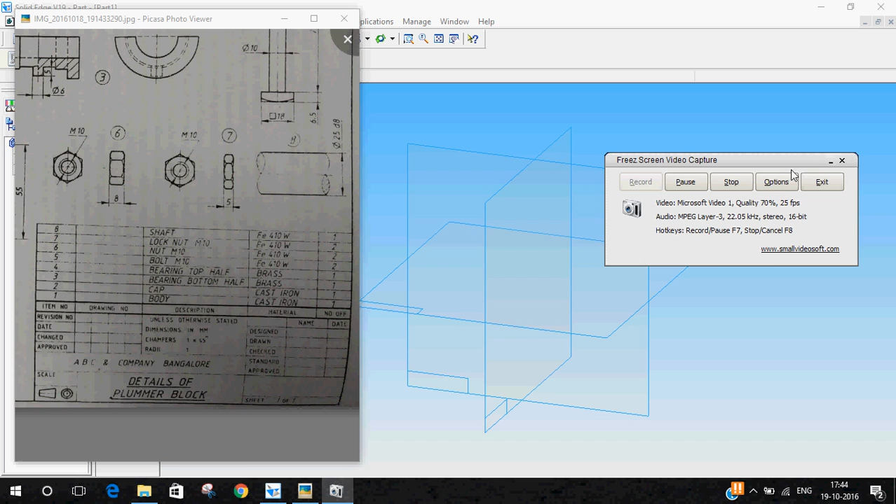We'll start off with the first part, which is the body. You can see the two views of the body here - this is the front view and this is the top view. We'll start off by sketching on the front plane. This part cannot be done in one or two steps; multiple steps need to be followed to finish it. In the first step, we'll start with the base of the body.

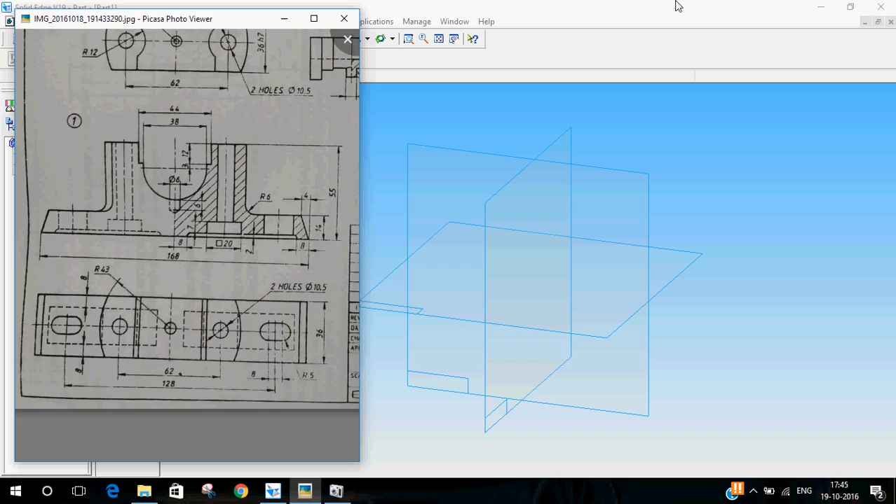I'll select create a sketch on the front plane, and then draw the basic shape of the base, which is a trapezium. Always make sure to take the axis as reference. Don't start off by drawing somewhere randomly - start off on the axis, it will help you.

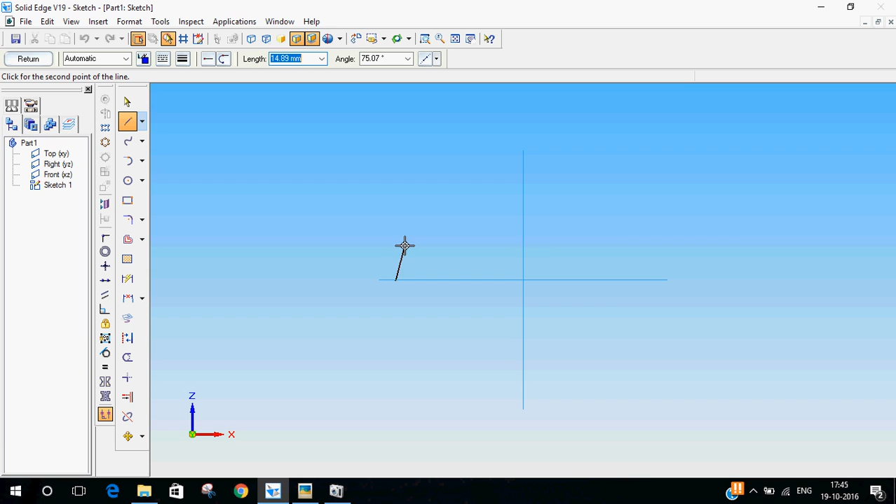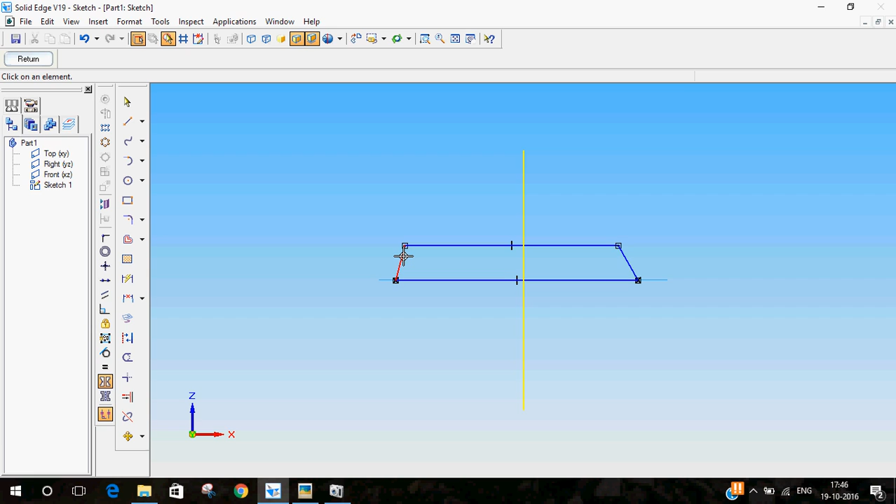Okay, my basic shape is ready now. What I'll do is make it symmetric about the center axis. To do that, select the symmetric relationship option, then first click on the symmetric axis, and then select the two lines or anything that needs to be symmetric. As you can see, now they are at the same angle and the same dimension.

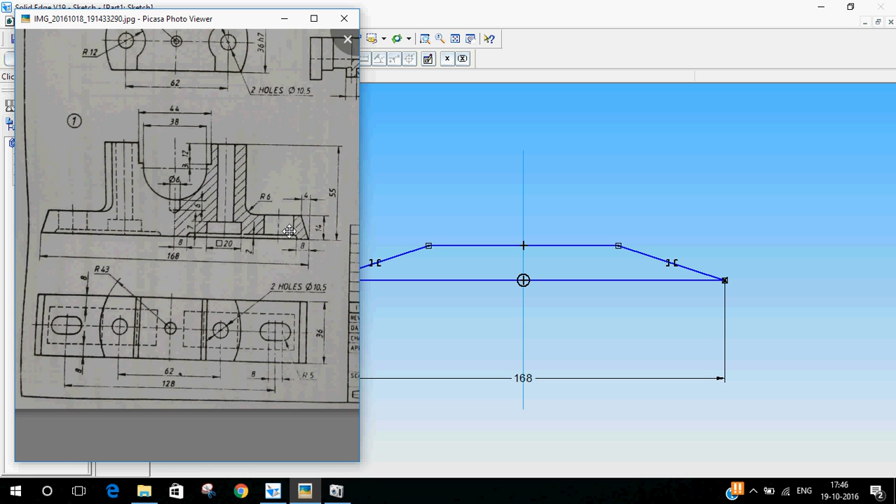So we'll dimension this part now. The total width is 168 mm, so I'll make it 168. This small angled area should be 4 mm, so I'll do that - okay, so this is 4 mm. I'll pull it up. As you can see, the dimensions are changing on both sides. The height is 14 mm.

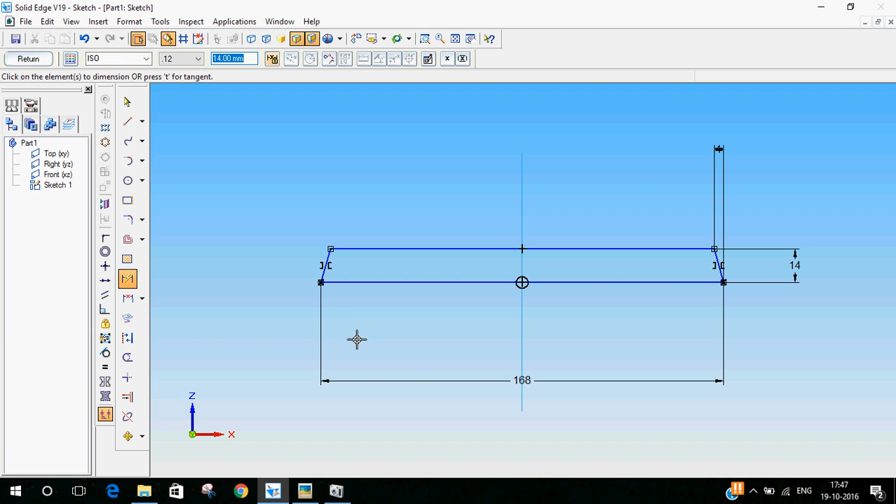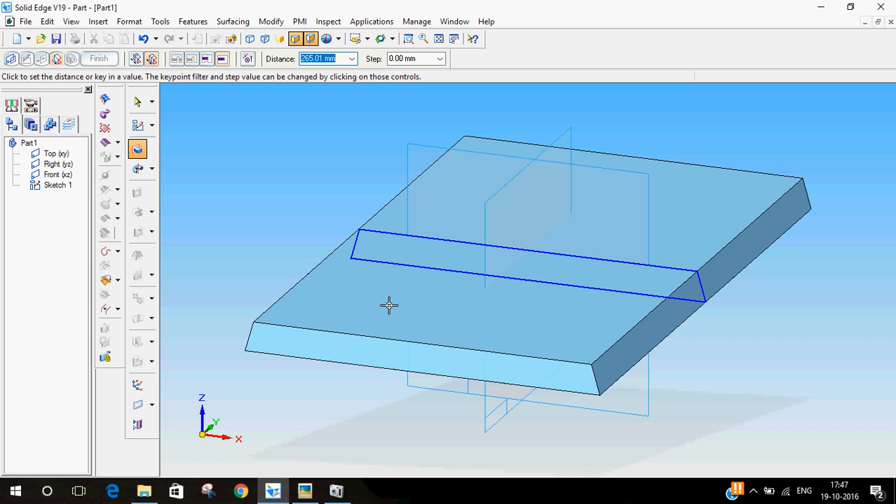Okay, so that is the only dimension we had to give for the base. So I'll return from the sketch, then we'll have to protrude this. Let me protrude this on both sides. Now the width is 36 mm, so I'll type in 36. Okay, so the protrusion is done. Always hide the sketches.

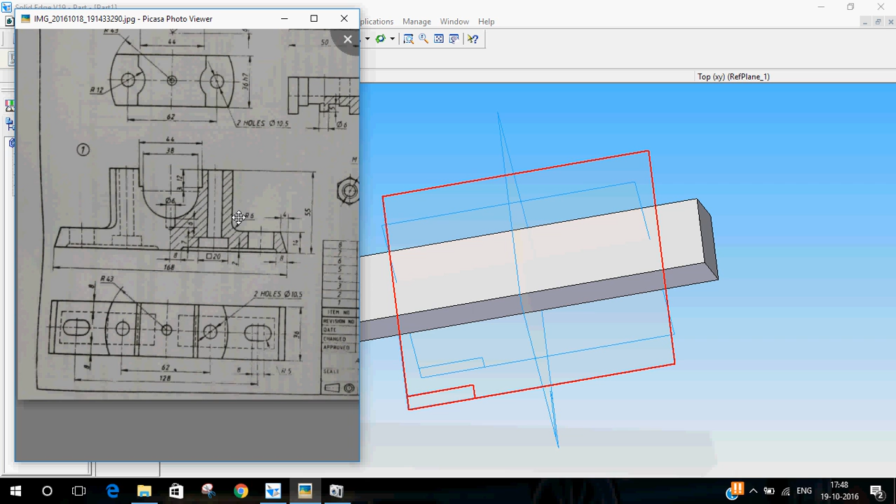Okay, so the base is ready now. The next part is we'll have to do the curved surface which is on the top. As you can see, this curved surface extends down till the base. So to do that, I'll select sketch on this top plane of the base. Now we'll start sketching it.

As you can see, there is a full circle of 43 radius, that will be 86 diameter. I'll draw that out first - from the center should be 86. Here I'll set the dimension, it's 86. The next thing is you just have to close these two lines and trim off the remaining edges.

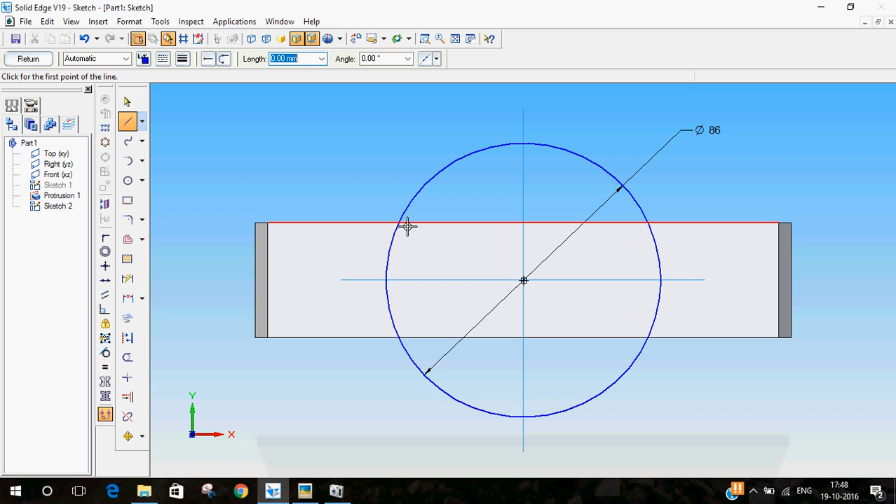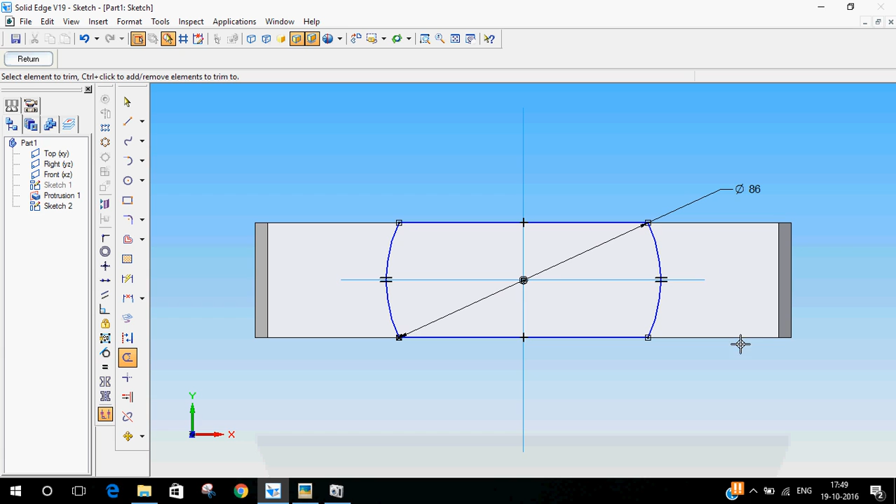To do that, I'll draw a line at the intersection point from here till this line, and do the same thing at the bottom also. Okay, so now we will have to trim out the unwanted edges. So this is unwanted, I trimmed it out. I'll see whether anything else is left. Okay, that is only so much we have to do in this step.

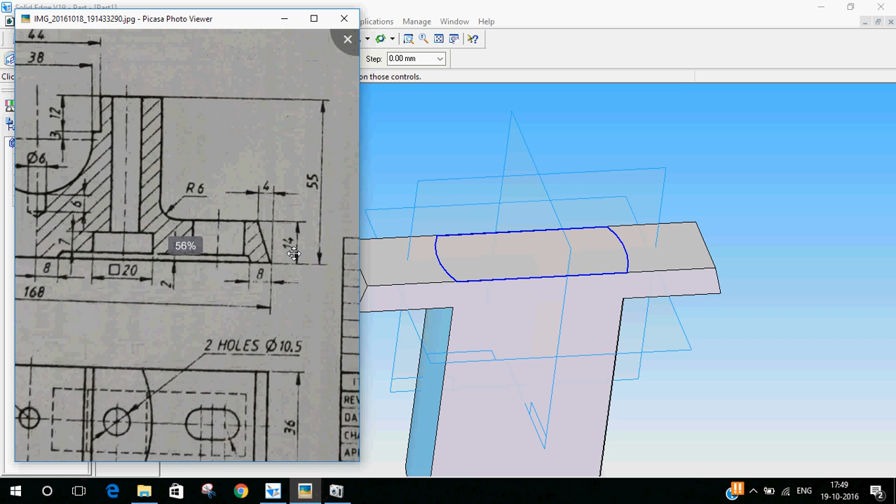So I'll return from the sketch, select protrusion, select the sketch, and then protrude it upwards. The total height from the base is 55, so I'll have to protrude it to 55 minus 14 mm, which is the base we already did. So this will be 55 minus 14, that is 41 mm.

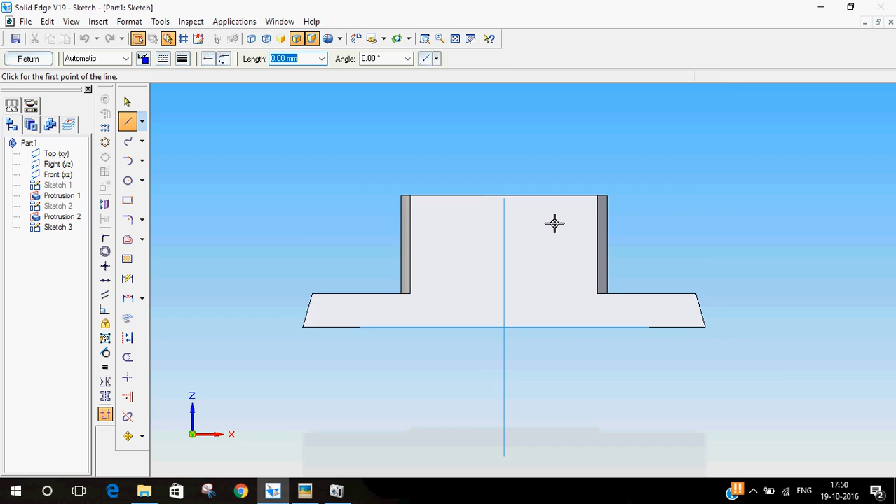Okay, so now the basic shape is ready. Now we will have to cut out this part from the top portion. To do that, I'll select sketch on the front plane and then draw the profile. The profile consists of a semicircle and some lines, so first we'll start off with a semicircle.

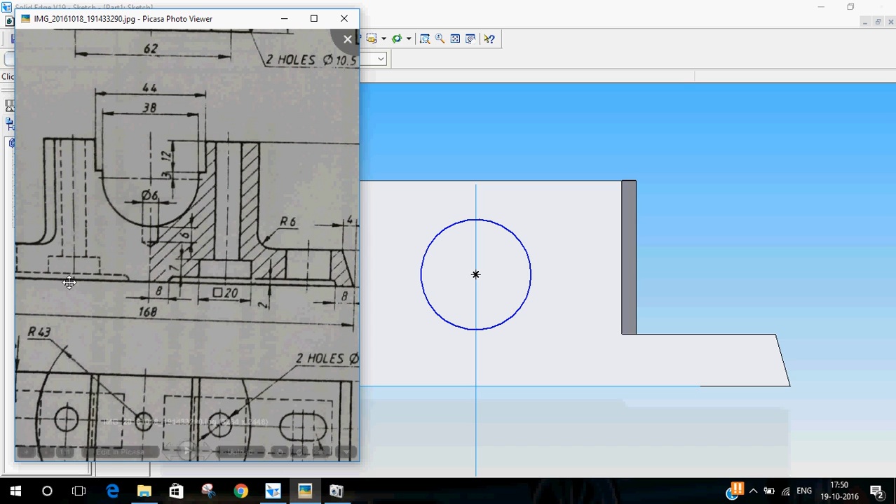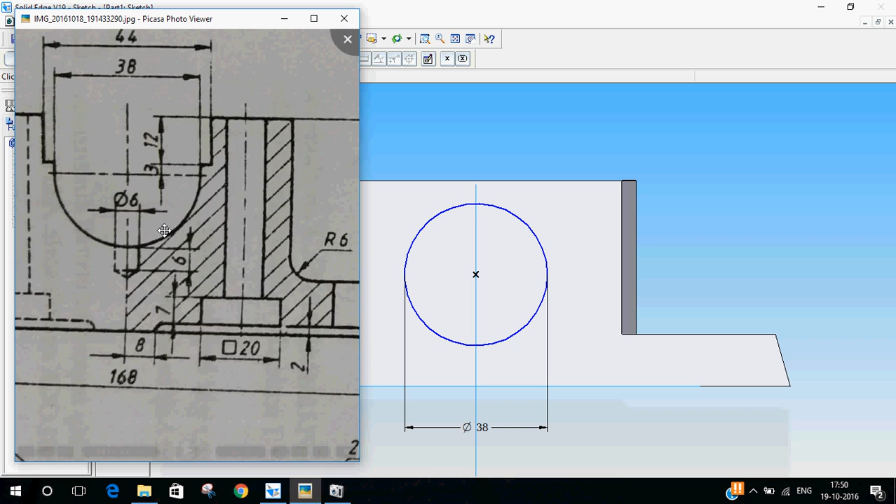The diameter of the circle is given to be 38. It's not specified anywhere here, but you can see it on top, it is 38, so I'll make it 38. And it has a small extension of 3 mm and then it comes out to be a step, so we'll do that. From the side portion, tangentially I'll draw a line upwards and then create a step. I'll do the same thing on the other side.

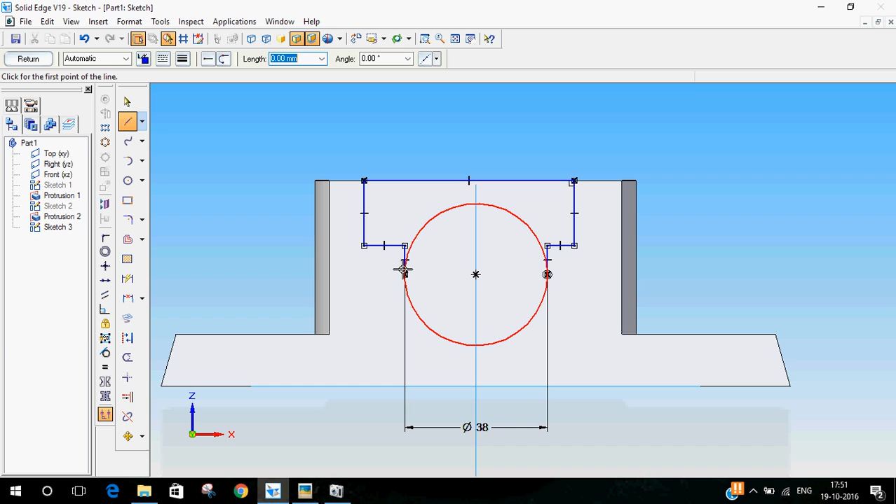Okay, so this is done. I'll trim off the unwanted edges. Okay, so that was the unwanted edge.

Now we'll start dimensioning it. This height should be 12 mm. Before that we'll make it symmetric again so that the dimensions change on both sides. We'll make these two symmetric and even these two.

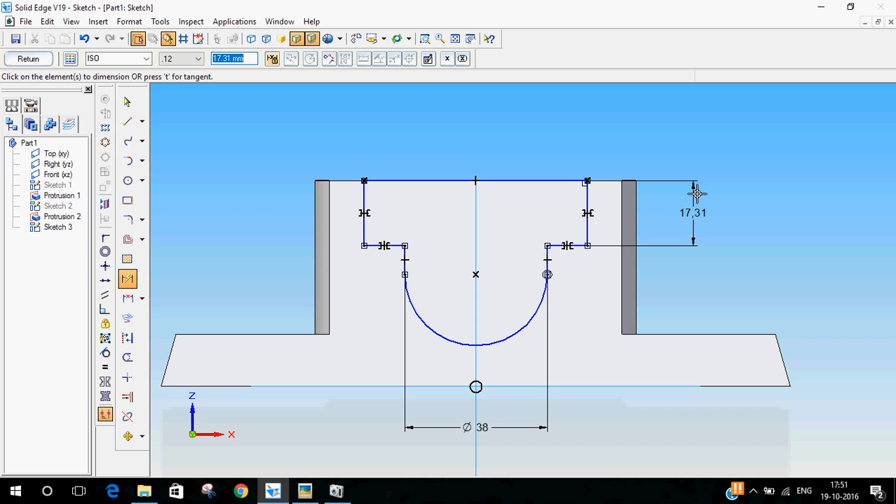So this is now 12 mm, and this small portion should be 3 mm. Now the overall width is 44 mm.

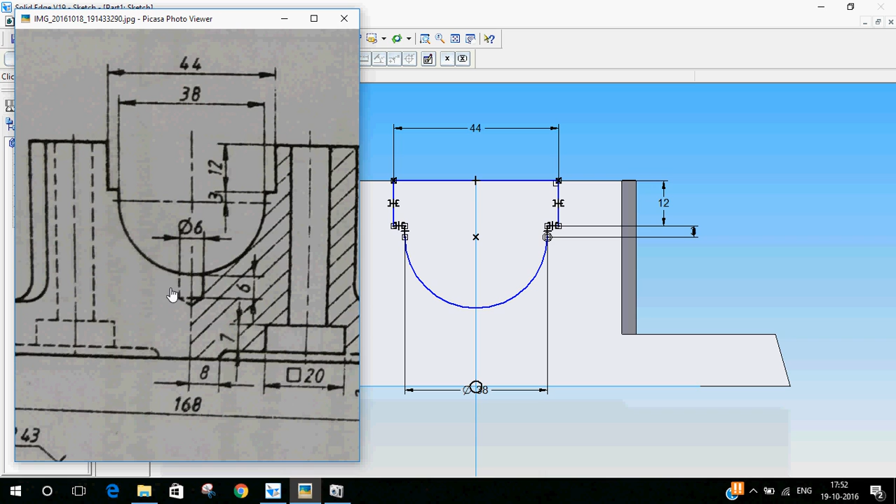Okay, so our sketch is ready to do the cutout. Now I'll return from the sketch, select the cutout option, then do a symmetric extent on both sides. No need to specify the dimension, just pull it out and then click anywhere.

So the basic shape of the plummer block body is ready. Now next thing we have to do is create some holes and slots in the whole thing. So now we'll start off with a cutout in the base.

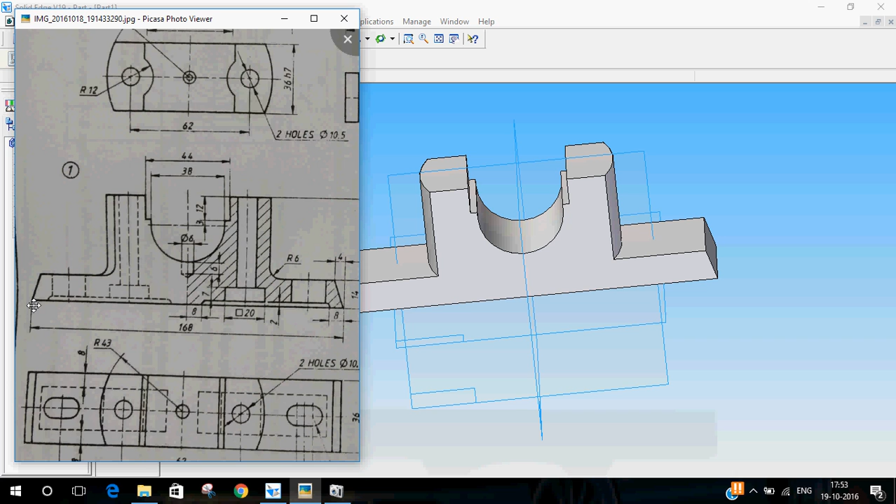You can see here in the top view, it's a rectangular cutout and the two edges have been filleted. So we'll do that first. To do that, select sketch on the bottom plane and then draw a rectangle.

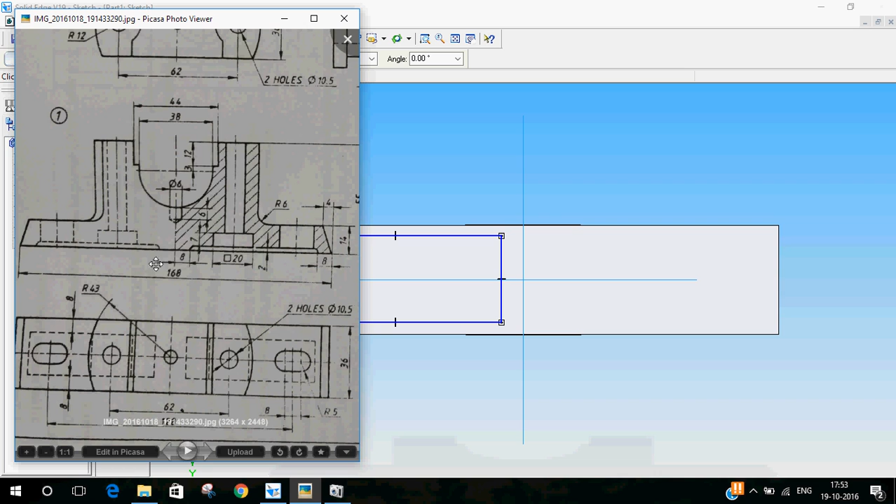Okay, now we'll dimension it. You can see from the boundary, the rectangle is 8 mm on each side. The top and the bottom is given here. In the sides it's been mentioned here, 8 and 8. So from this edge is 8 mm and the same way from all the edges.

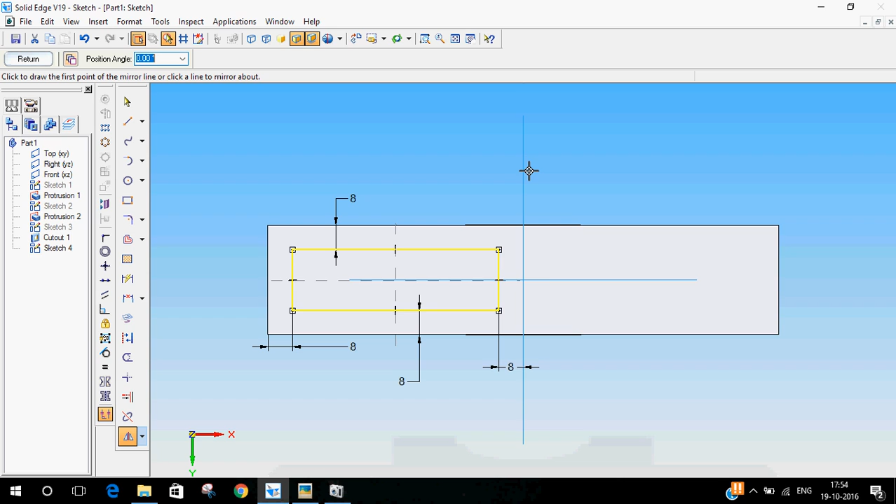Okay, now the same rectangle should come on the other side. We'll use the mirror command for that. Select all the lines you have to mirror, then select the mirror axis. So it's been mirrored now. I'll return from the sketch.

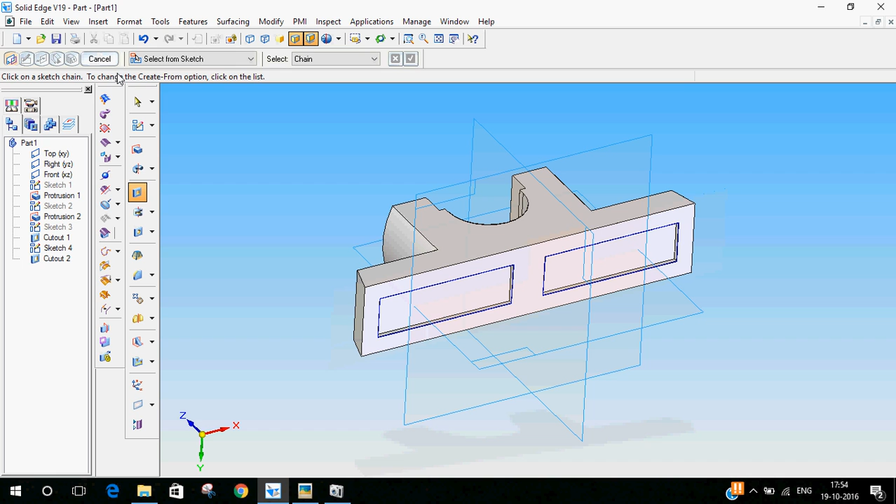Now you can see the cutout depth must be 2 mm. So we'll cut it out now. It will go in by 2 mm. Okay, so this is done. Hide the sketch. Okay, so it should look something like this.

Now the edges have been filleted. As you can see here, the radius is given to be 1 mm. So we'll do that using the round option. Type in the radius as 1, then select the 4 edges.

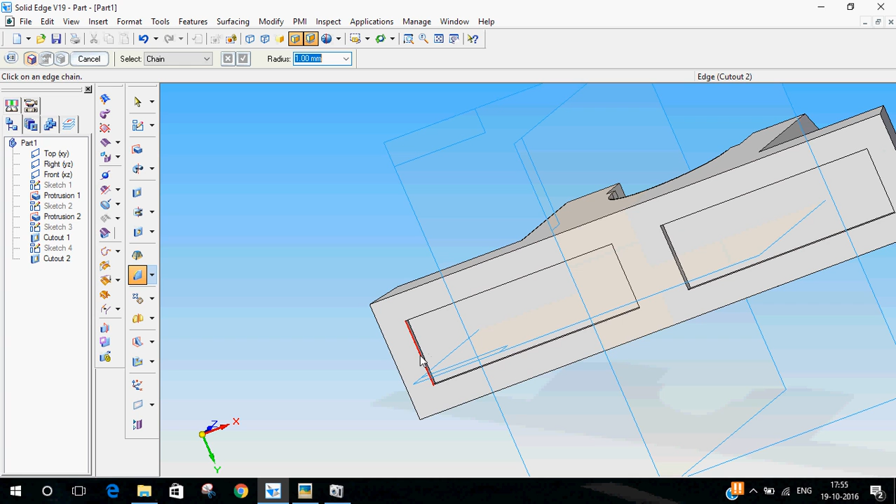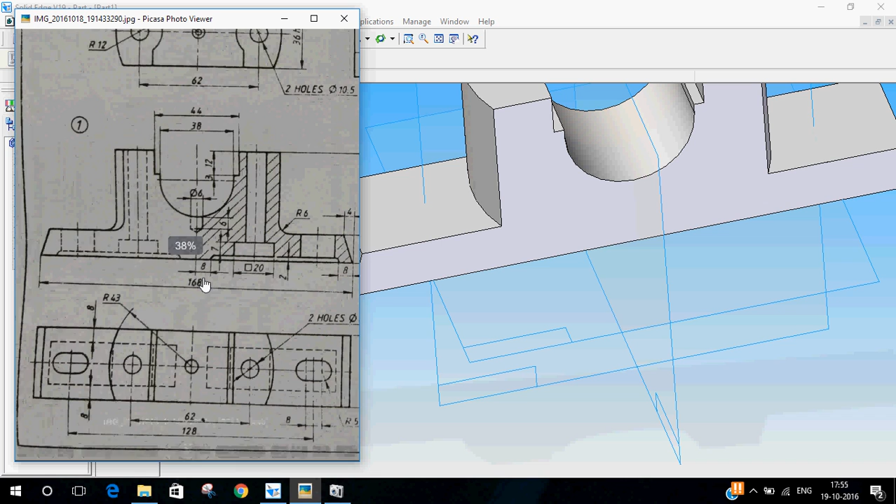1, 2, 3 and 4. Yeah. So this is also done, the fillet is done. Next step is we will have to do this slot.

To do the slot, again we'll sketch on this top surface of the base. Then we'll draw this profile. To draw that profile, what I'll do is I'll draw 2 circles first.

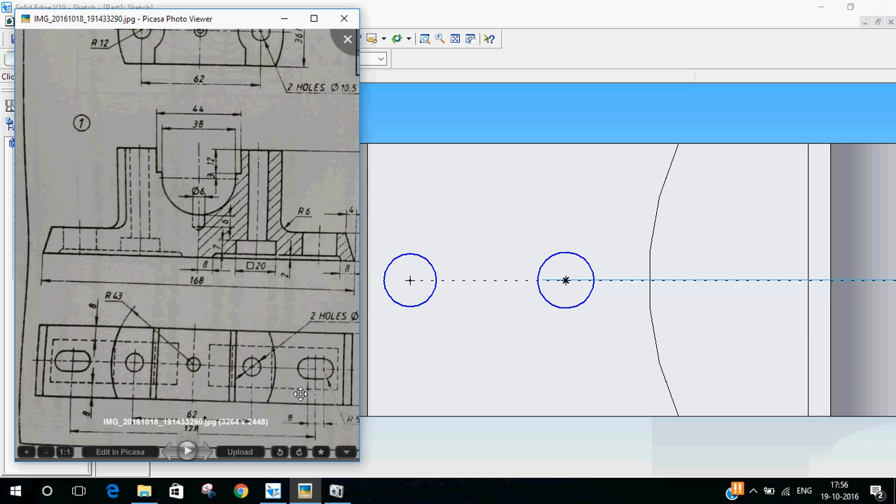Then we'll see what the diameter or radius is. The radius is given to be 5 mm, so both of them should be 10.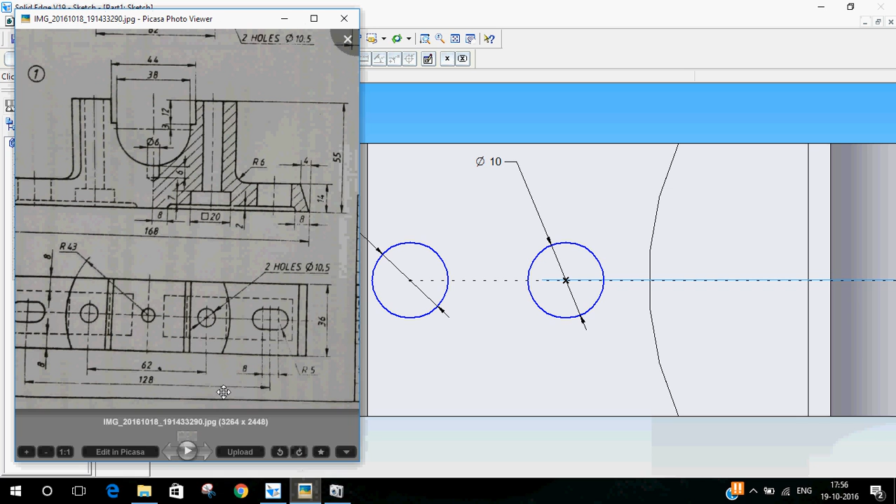Now we'll have to draw 2 lines, one on top and one on the bottom. Before that, we'll set the center to center distance, that is 8 mm. So again we'll select the center to center distance to be 8 mm.

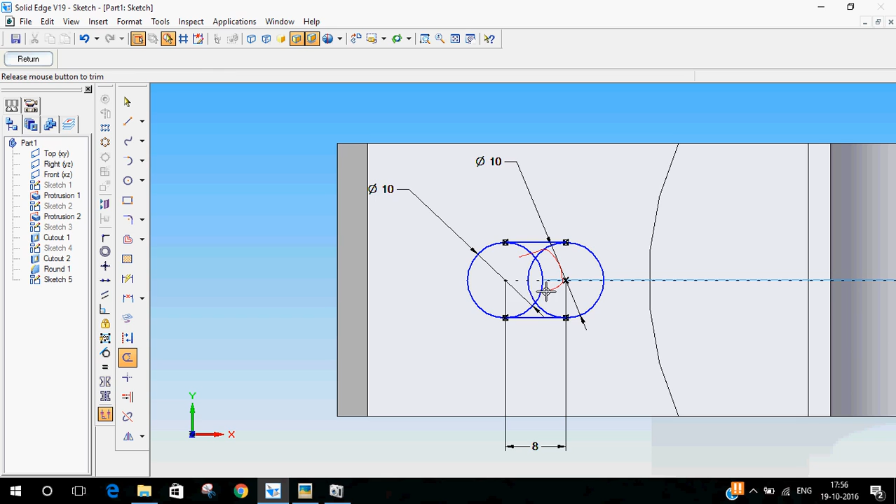Now draw lines from top of each circle and trim off the unwanted things. Okay, so we have a slot ready now.

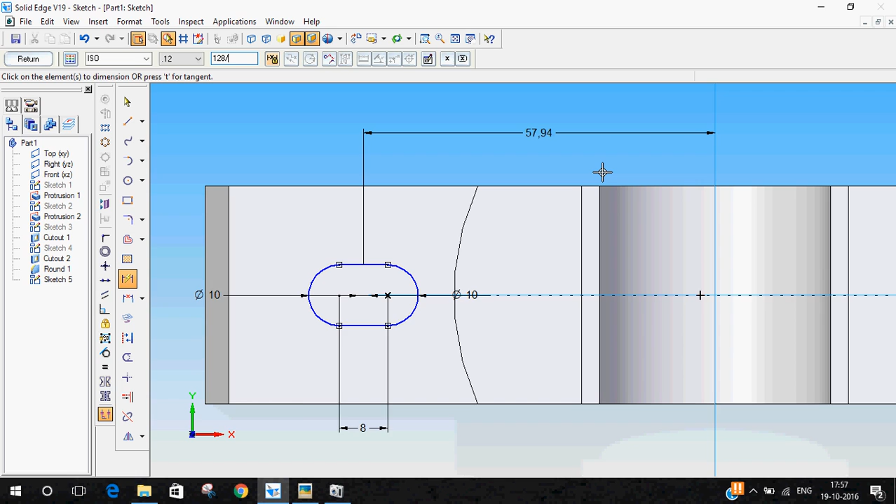The next thing is they have given the dimension from both the slots. Center to center is 128 mm. So since I've done only one, from the axis it will be 128 by 2. So I'll set it to be 128 by 2. From the axis, come to the midpoint of this line and make it 128 by 2, that is 64 mm. Now this is done.

Mirror the same thing on the other side. Select mirror. Yeah, now it has been mirrored. We'll cut it out.

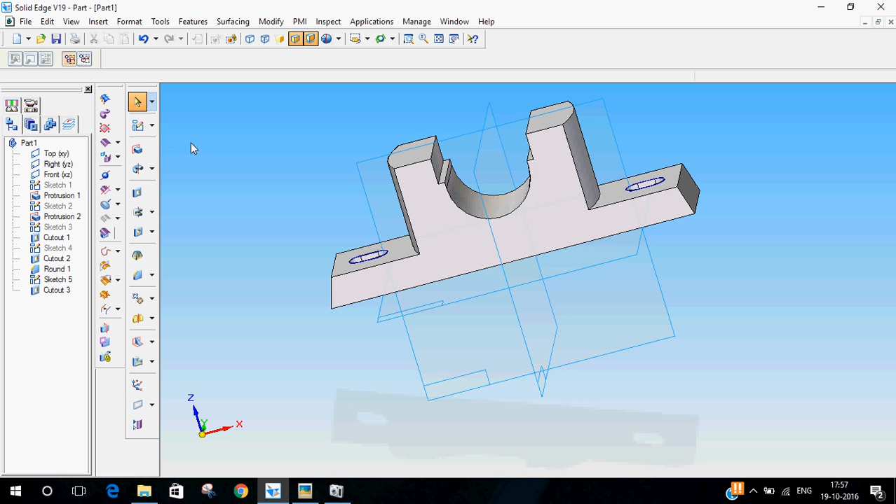Okay, so I selected the sketches and then pull it downwards. Yeah, so the slots are done. This is how it looks.

The next thing is you can see this small rectangle here. That is not a circle actually. In the top view, if you see, it is a square cutout, and the dimension is mentioned here. You can see the small square box that represents it is a square of 20 mm each side.

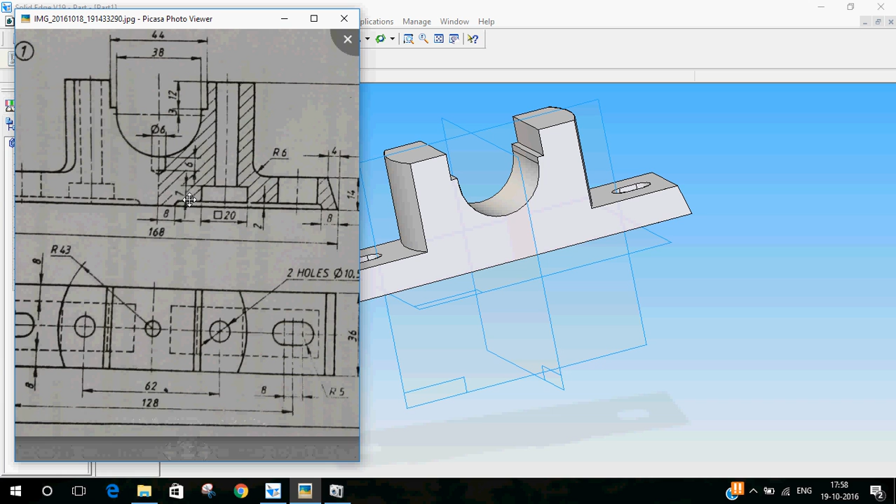So we'll do that now. To do that cutout, and it is 7 mm depth, we'll start on this by sketching on this inside surface and then draw a square. First I'll draw a rectangle itself.

First I'll draw a rectangle itself, and then the dimension should be 20 mm. Yeah, our square is ready now.

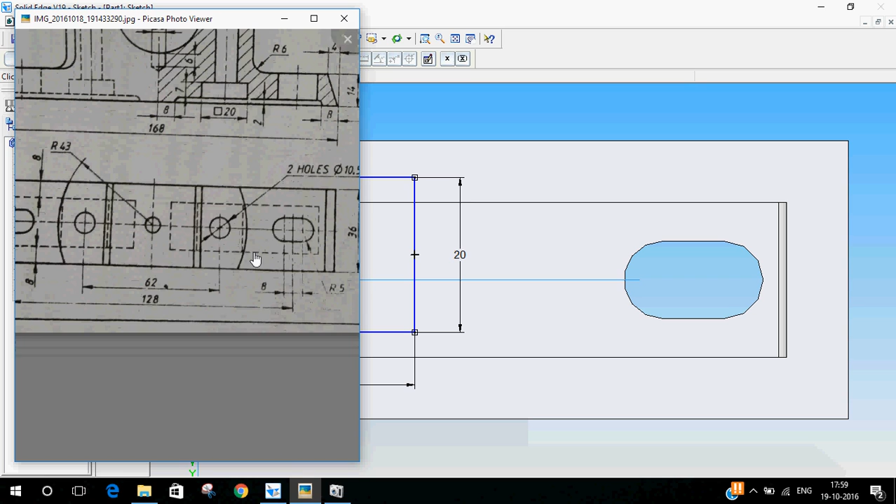We'll have to set it where we need it now. You can see the distance between the centers is 62 mm, and it sits exactly in the center. So now it's in the center.

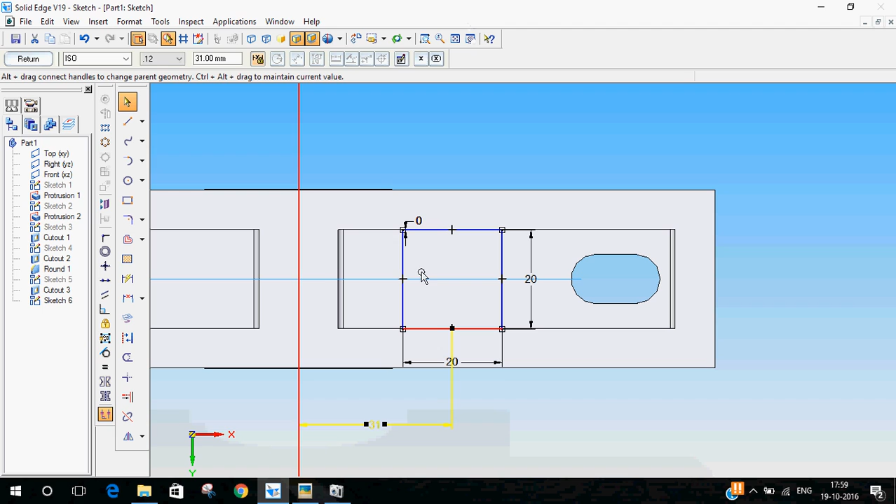The distance between the centers is 22, so I'll select the midpoint, then make it 11. Sorry, it's not 22, it's 62. So this will be 31. Okay, so our square is ready on one side, so I'll mirror it on the other side also.

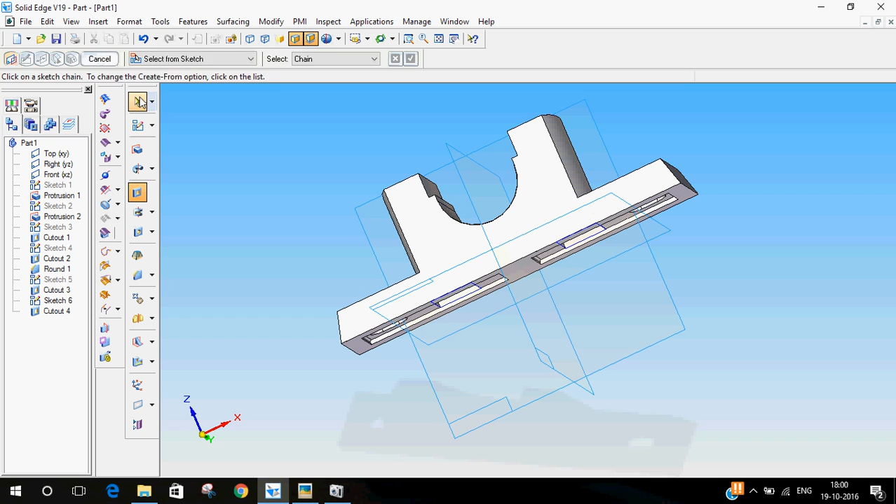So the square is ready. We'll again use the cutout option. This time the depth is given to be 7 mm. I'll select the two sketches, then upward the depth should be 7 mm. Yeah, it should look something like this.

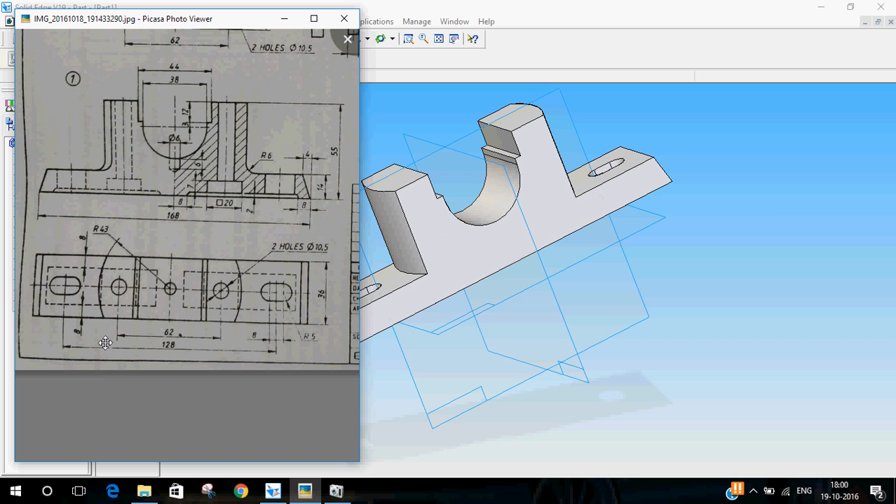The next thing is two holes that go through the body. The diameter of the hole is given to be 10.5 mm and the center distance is 62. We'll do it from the top plane. The dia is 10.5 and distance between them should be 62, so half distance would be 31. I'll again mirror it.

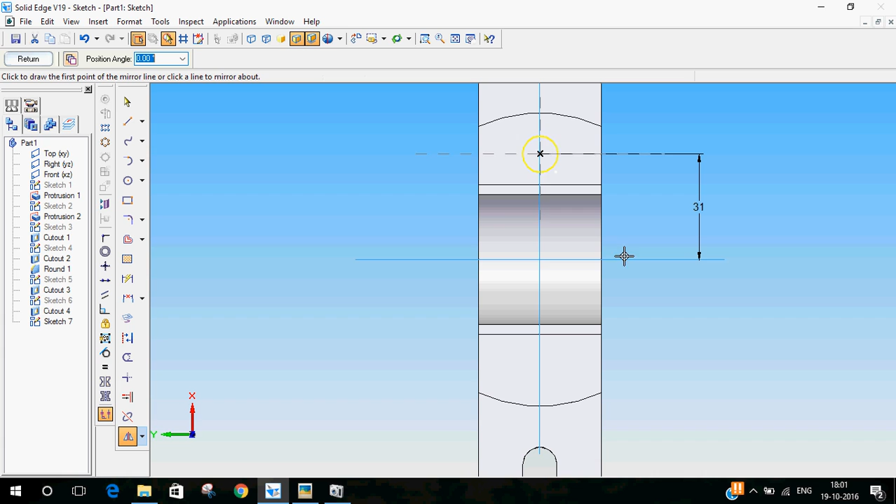We'll again use the cutout option. Again no need to specify dimensions for this. Just pull it down till it passes through and then click anywhere.

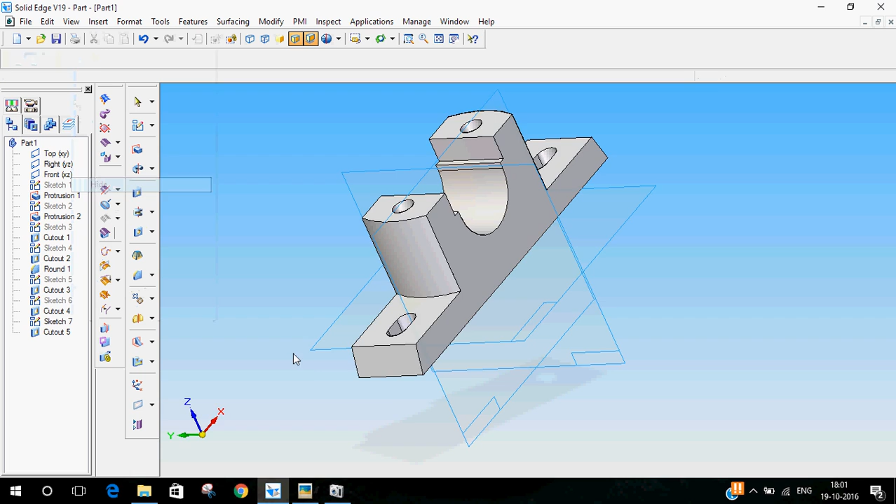So we are about to complete everything. The next thing is we have to add a fillet here that is of 6 radius, and then we will have to add a hole in the center.

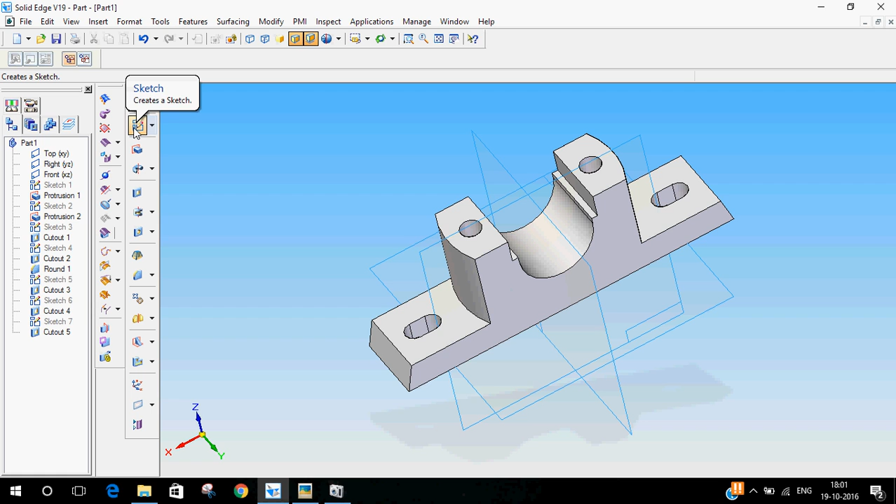We'll first add the hole. To do that, select a sketch in the front plane. We'll use the revolve cutout command to do this hole. The hole is of 6 mm diameter, and the depth is also 6 mm.

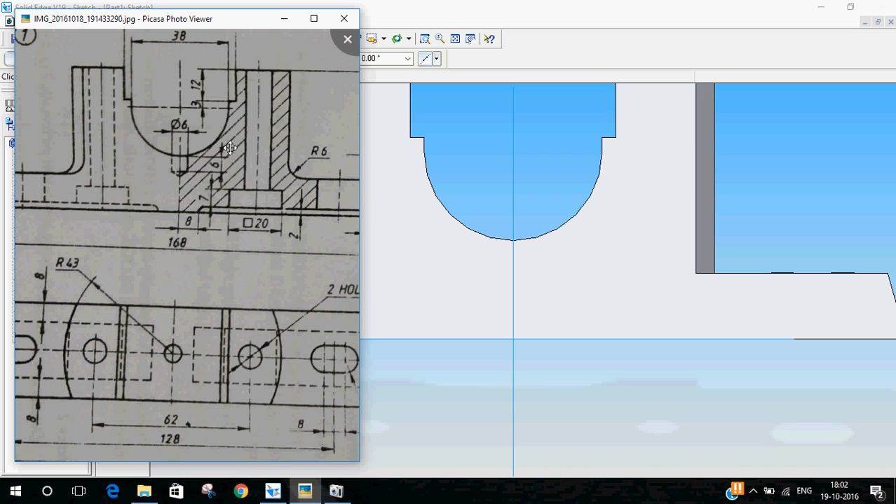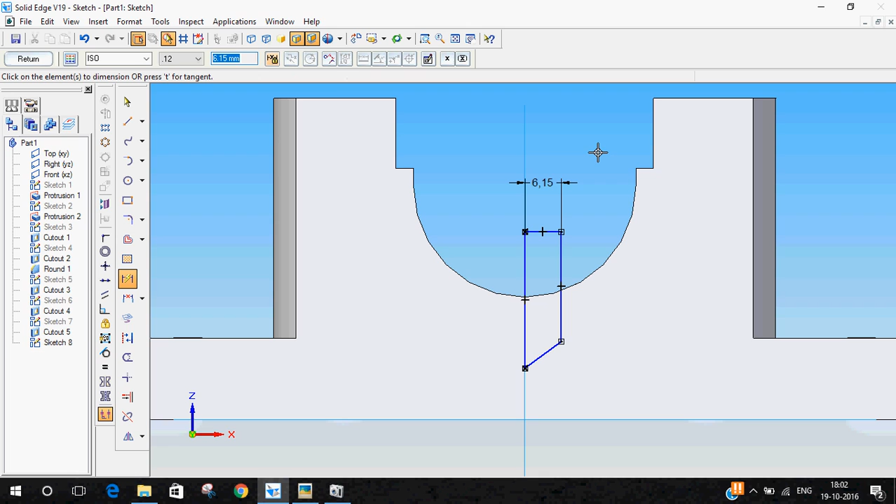First draw out the basic shape and then set the dimension. The diameter is 6 mm, so this will be 3, and as you can see I have extended it till the top, because if I draw a horizontal line here itself, only this portion will get cut out and so much portion will be left out, and it will show an error while doing the cutout option.

So I have extended it till the top. You can extend it anywhere you want, nothing specific, but you have to make sure that the depth is 6 mm. To do that, select smart dimension from this edge to the tangent of the circle. Just a second, let me see.

Okay, it's not working out. Draw a line first tangentially. If it's not a tangent, you can select the tangent option and make it tangent to this circle, and then now you can set the dimension easily. So this also should be 6 mm.

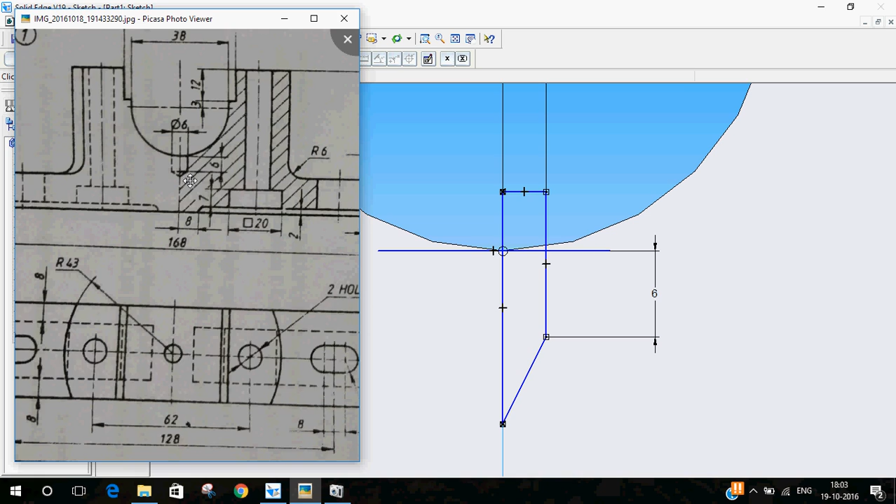Now the cone at the bottom, they have not specified any dimension for it. That will be a standard 118 degrees. So I'll select the angle between command. The total cone angle this way will be 118, so I'll set this to be 118 by 2, that is 59 degrees.

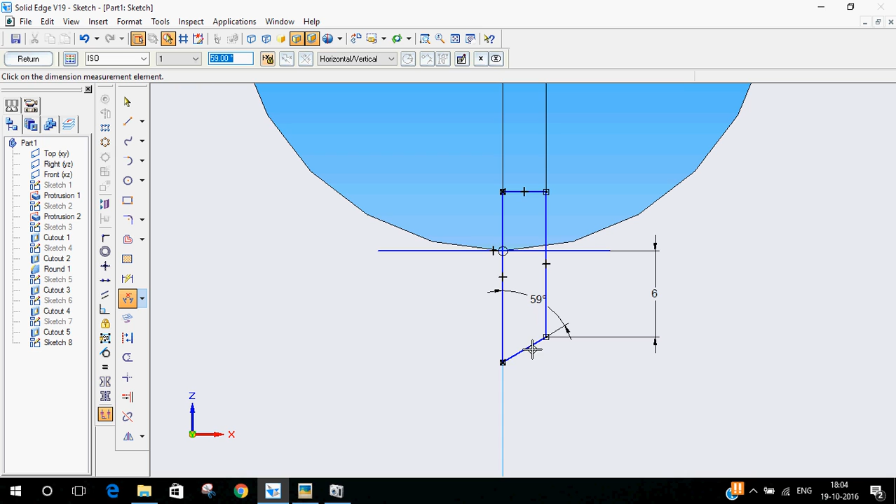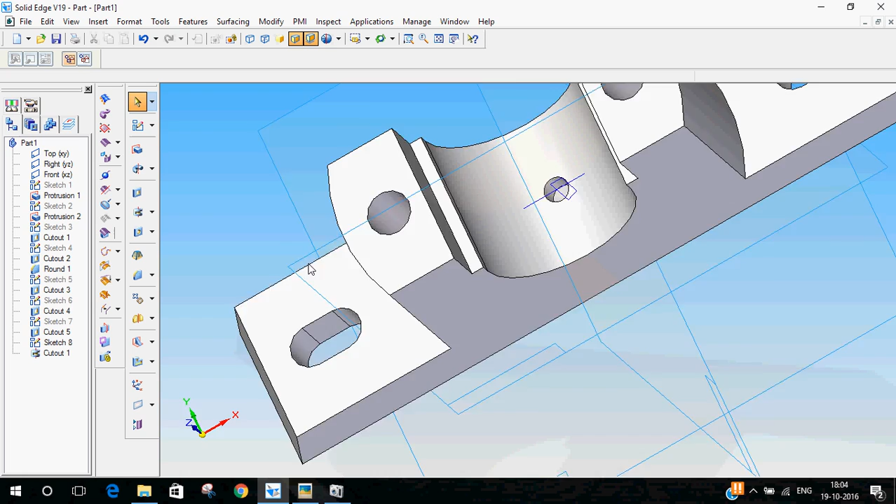So our sketch is ready. We'll return from the sketch and select the revolve cutout option. Now select the sketch—don't select this line, only select the center one—and then for the axis select this edge, then revolve it 360 degrees by selecting this option. Now the revolve cutout is ready. The cone is also done at the bottom. I'll hide this sketch.

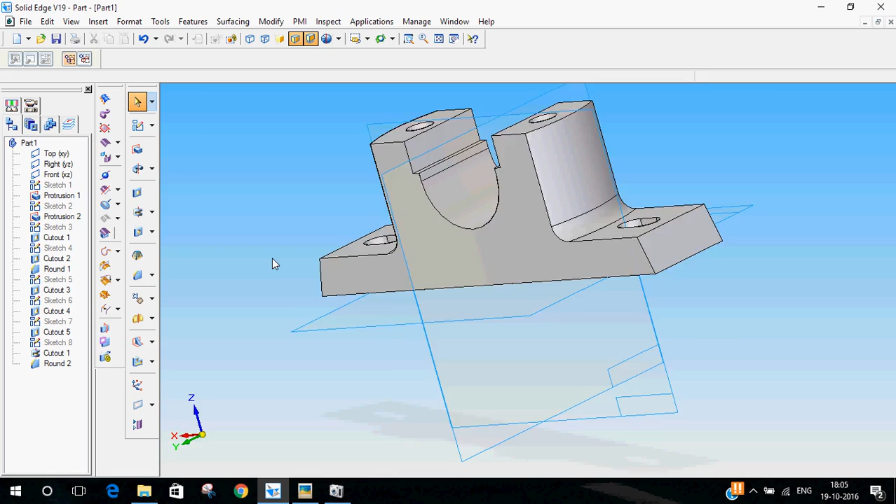Now the next part, the only thing left is to do this fillet here. We can do that easily by selecting the round option and setting the radius to be 6 mm. We'll select the round option, make the radius 6, then select these two edges. So this part has been done completely.

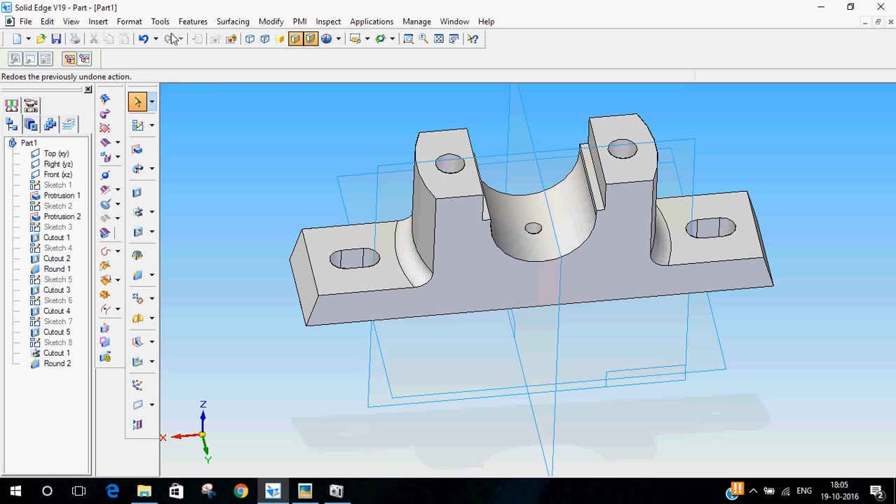Now I'll show you a main thing in saving, which will help you get the part list automatically in the assembly. To do that, first the material is given to be Fe 410 W—sorry, these four parts are Fe 410 W and the body is cast iron.

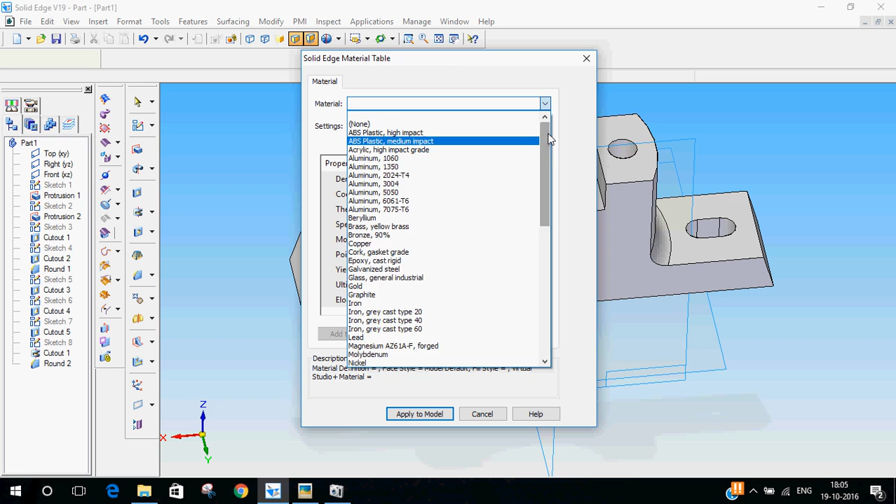So to set the material, go to Tools and then go to the Material table. In the material box, type in cast iron, or you can select cast iron from here. If you want to give a custom name, you can just type it in. I'll type in cast iron and then click on Apply to Model. No need to set the properties since we are not dealing with it. Just type in cast iron and apply. So material has been applied now.

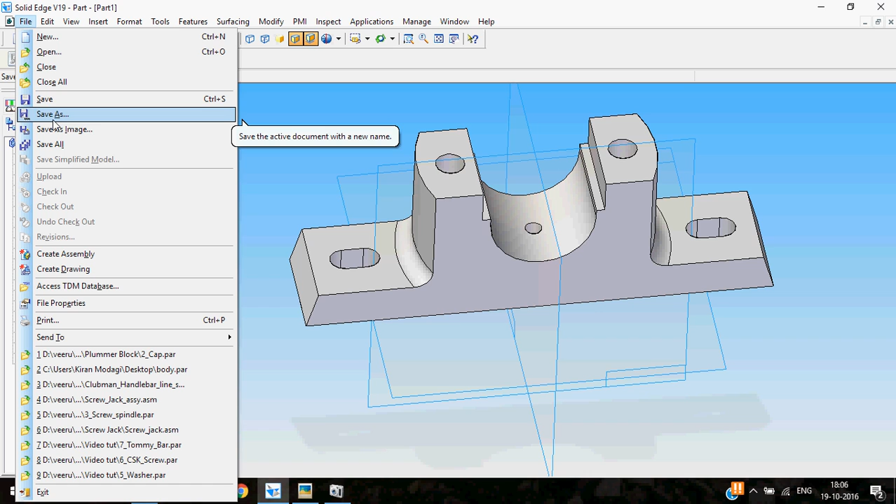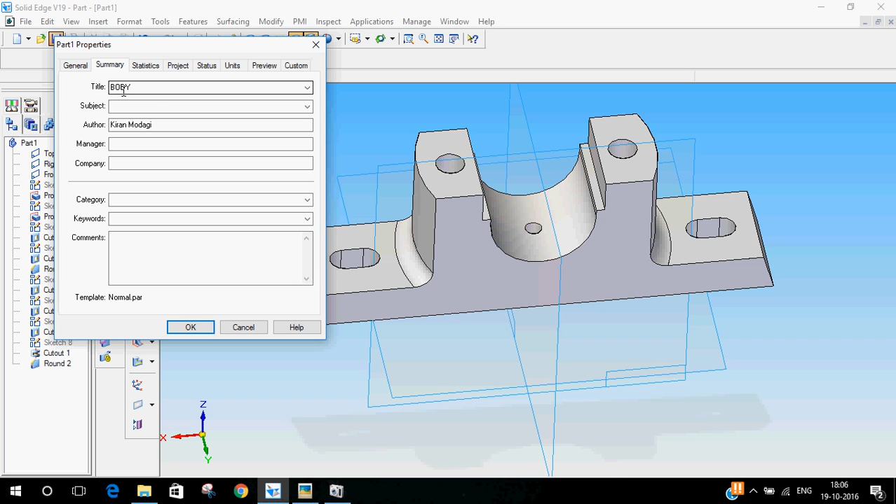Then while saving, do not click on Save As, just click on Save, and you'll see a small dialog box pop up. Go to Summary and under the title type in whatever the name is given. The name is body, so I'll type in body. Don't worry about the remaining things, not required. So under summary, in title, name it body and then save it. And even the parts, while saving, save it according to the names, so that will help you finding it.